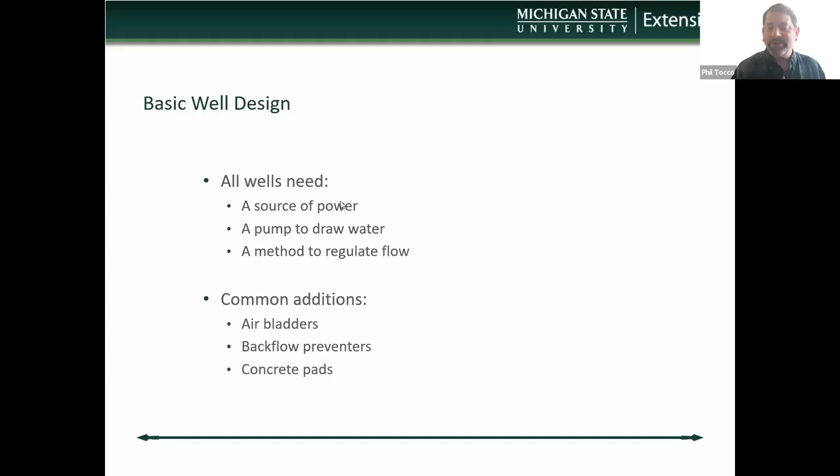Now, okay, so we have three basic types of wells. The dug well is that well that Annalisa showed. It tends to be a shallow well. It's not a very deep well. Usually, you have to have a high water table to get down to water.

There is, in fact, even with all of those precautions, even with a roof and that stone wall and a cover on it, a pretty high risk of contamination for a number of reasons that we'll discuss a little bit later. So the well is good for a lot of uses, but again, it's still a pretty high risk of contamination.

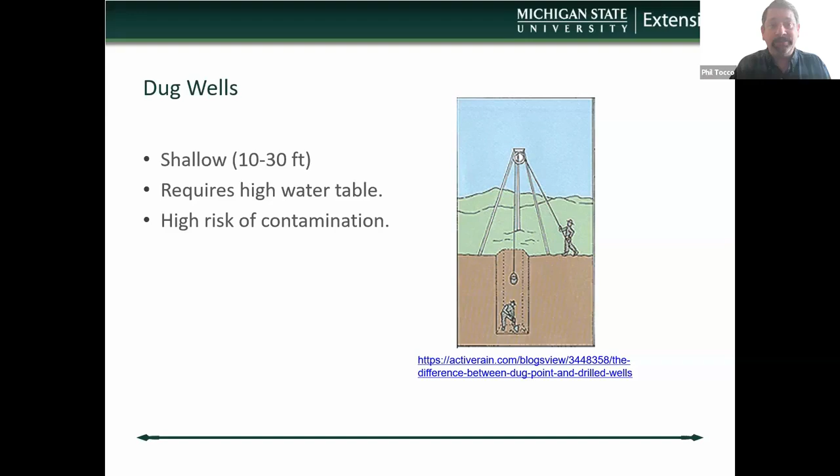Driven wells are another one. You'll see this in a lot of sandy areas. You'll see this in places that are close to the lakes that have a lot of sand and also have a fairly shallow water or high water table. It's a shallow well again, up to 30 feet, and literally the point is driven into the sand down into the water table. It's often used for irrigation because it's very quick to install, relatively speaking.

It's cheap to install. I bought myself a sand point well as a demo device; I think I spent $50 on it. I would need maybe another 20 feet in stainless pipe that would attach to it, and then a driver of some kind or other to drive it into the ground to where it would hit water. So the idea is you're not spending many thousands of dollars to put the well in.

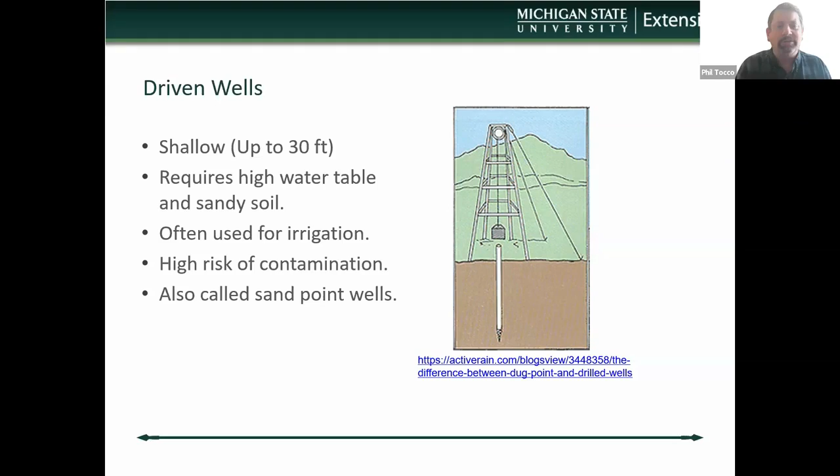It pumps a reasonable amount of water, but what it pumps is largely water from a surface water source that's been drawn through the column of soil and particulate that it sits in. So they are also called sand point wells. And because they're drawing a lot of surface water in general, there is a pretty high risk of contamination there. And again, we'll talk a little bit more about how wells get fouled as we move along.

The gold standard, what most people are using if they have a home well or if they've got wells out in the country, are drilled wells. Typically, these are very deep. They usually go down at least 50 feet, usually deeper than that. The deeper they are, the safer they are generally. Basically they dig down until they reach the bedrock, and they dig down just a little bit deeper than the bedrock when they hit water.

And then they sink a casing right down so that it sits on the bedrock, and then the well itself draws from the rock underneath, the fissures in the rock. Typically, they take that casing and they pump a mixture of bentonite, which is a clay that swells, and they mix it with a little bit of sand and a little bit of concrete so that it forms this watertight seal.

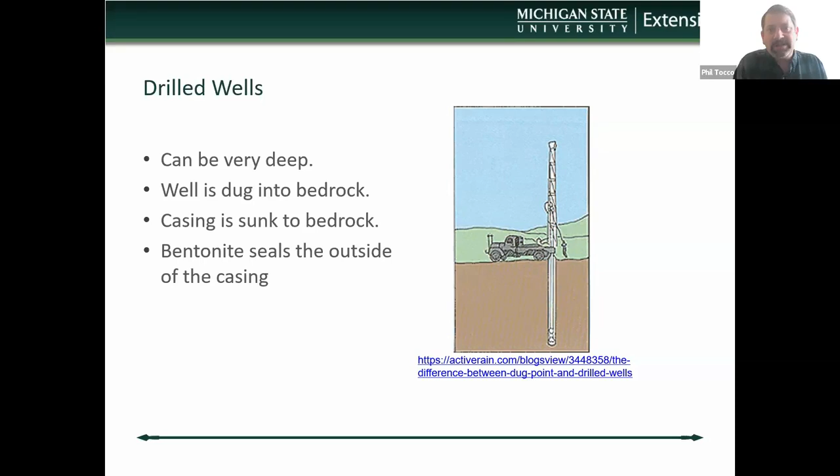And because there's bentonite in there, that clay is unusual in that when it gets water, it swells. And if it's dry, it shrinks. And they put it in dry so that it stays there. And then if water gets around into that, it'll swell up and tighten around the well casing. So it's a nice way to ensure that there's a nice tight seal there. So that's kind of how those are set up.

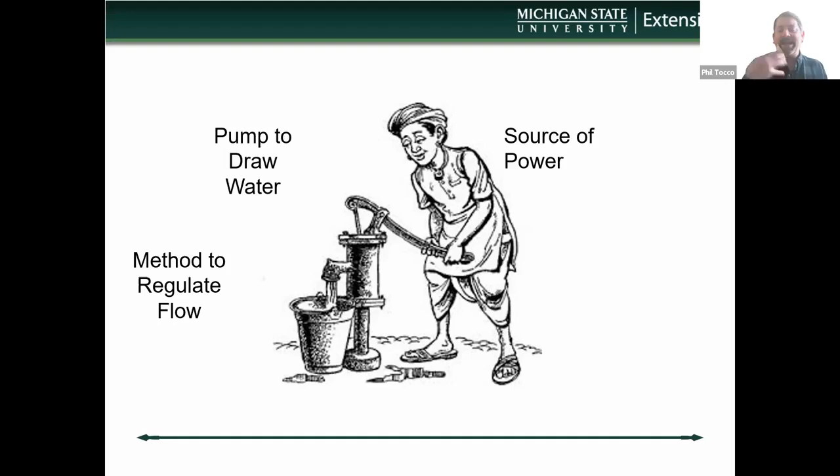Again, we talked through the wishing well example with Annalisa, but you see the same things that work here at a hand pump well. The source of power is the person doing the pumping. The pump to draw water is the plunger at the bottom that does this up and down motion that draws the water up into the column, and then the method to regulate flow is the actual stopping and starting of the pumping. So that kind of thing is true across the board.

Now we're going to talk about the pump a little bit more, and about other things that you might see. So there's three basic pump designs that you're likely to see in the Midwest when it comes to drilled wells. You could see a jet pump, an impeller pump, or a submersible pump.

Now, I use these three general designs because you're going to see this sort of layout of a half circle sitting on its side with some piping coming out and going into the ground, or you're going to see the half circle sitting above the well hole, or you're going to see a big round cylinder sitting on the ground. That's how I'm representing all three of these, in a very graphical icon sort of way.

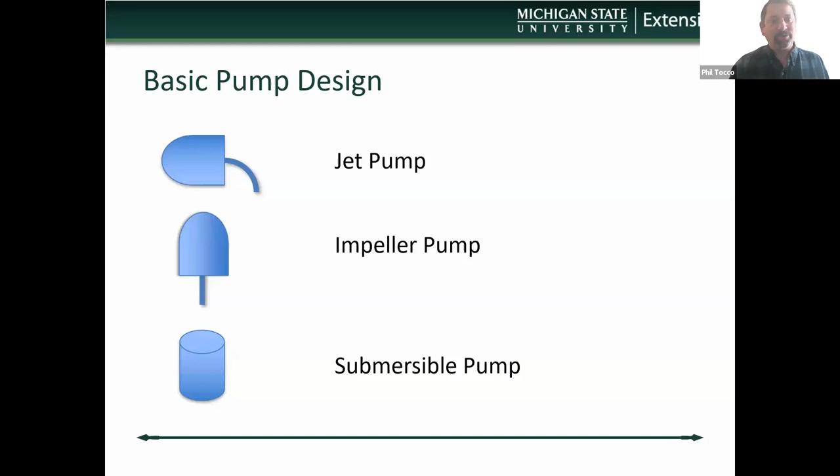So if, for instance, you have a really deep well, you're probably going to use a jet pump to pull it out. If you have a shallower well, other pumps might be more appropriate.

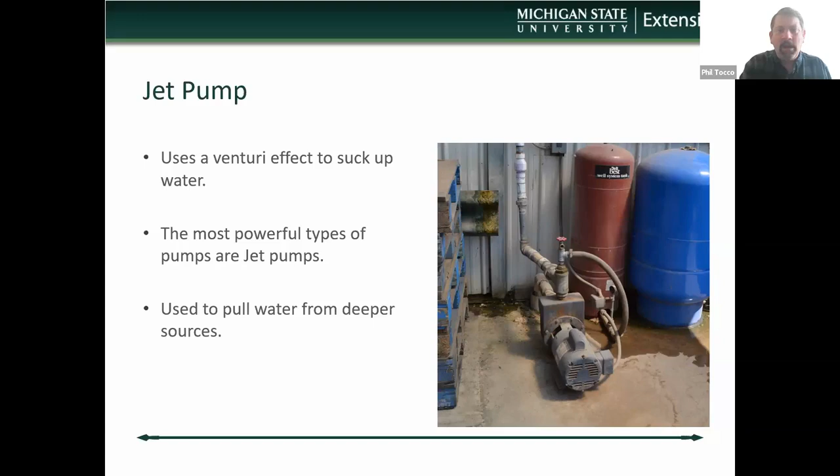It can generate higher volumes, but it's not as effective for deeper wells. So typically, 65, 100 feet. And it's hard for me to give a generalization, because anytime I come up with one, usually somebody says they found an exception to the rule. So as much as I say they can generate higher volumes, in some cases they may not be able to generate the volume you need. And it may be that they have a deep well that runs an impeller pump.

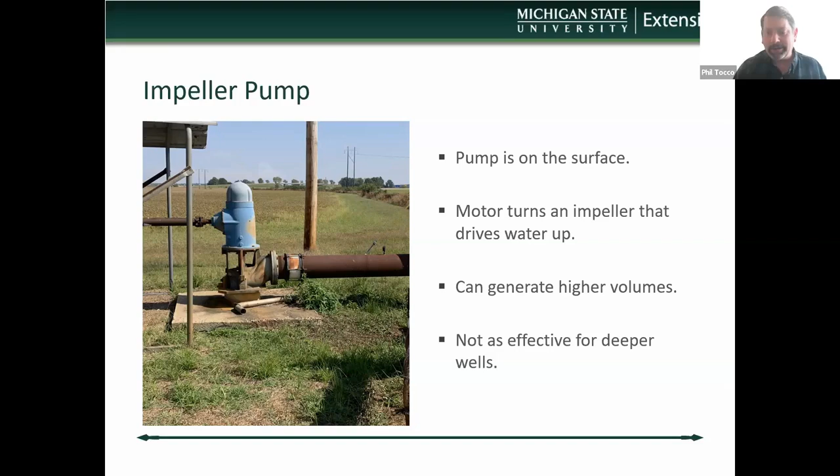So there's a couple of big issues with impeller pumps. The deeper they are, you can imagine if you've got a really long rod and there's a little vibration up top, because it could essentially act like a lever, a little vibration up top could cause big issues down below. So that's why an impeller pump may not always be the best choice, because that rod that drives the impeller at the base of the well is long. If you aren't perfectly stable up top, just a little vibration could mess up that rod pretty quickly.

So the last one is a submersible pump. If you've got a sump pump, like a dry well or a sump in your basement, the pump used in your sump pump is a submersible pump. It is built to live underwater. So typically the pump itself is below the water line, and it's used for lower volume withdrawal, like in a house situation.

So typically anybody that has significant acreage or needs significant water, if they've got a submersible pump in a home well, they'll likely also use a cistern. They'll use the home well to fill the cistern, so they can have adequate volumes of water when they need it. So you'll see that typically with submersible systems. Again, these can be very deep, 100, 200 feet deep. It doesn't necessarily matter. They can do pretty well.

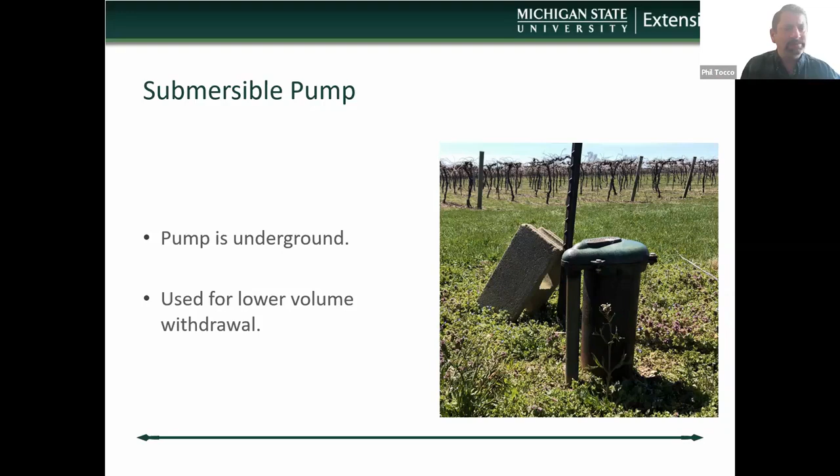So other parts you might see, and this is where we start to get into things like backflow preventers.

Oh, we've got a chat question. I want to make sure I don't lose anybody. Phil, would you say that the drilling company will generally indicate what type of pump to use? I would say yes. Most of the time you're not going to have to worry about that. They'll say, yeah, you need an X pump, or they might prefer a particular kind of pump. So they'll set it up in a way that makes sense. So yes.

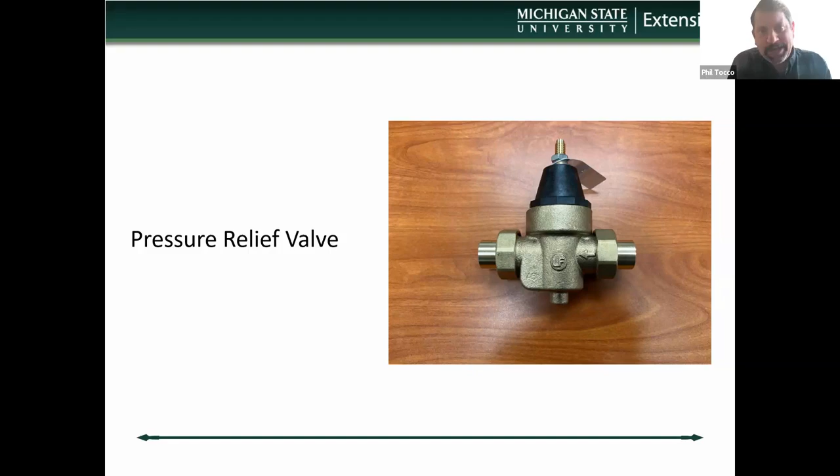Good example is if you're using drip irrigation, sometimes you need pressure reliefs or pressure regulators in the system to maintain a certain level of flow in a given area. So if you're using drip tape and you want to know that you're giving 10 gallons per minute, it may only be 10 gallons per minute at 10 psi. So putting that pressure regulator in there will keep the system at 10 psi and no greater. Because you could probably pump enough water in there to really drive that up. And then what you get is blown out drip tape and other things like that. So it helps to make everything work right.

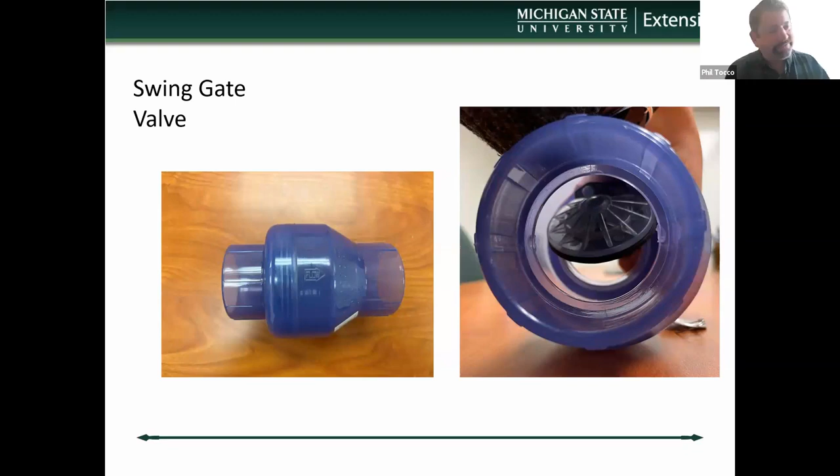So another thing is a swing gate valve. Now you'll notice some pictures here that show the arrow on that, the direction of flow. But there's some other interesting factors around this, and I'm going to stop sharing my screen for a second so you guys can see. I have the swing gate valve here. This is going to be interesting to see if I can make this work.

But the problem with the swing gate valve is it swings like this, and if it's oriented in a wrong direction, you'll notice how it just flops around like that. It never closes. So not only does it have a direction of flow arrow, but it also has an orientation. So it'll say this side up on it. So if it's sitting like this, let me see if I can make this work. If it's sitting like this, you can see it clamps down. But if it's sitting like this, it doesn't clamp.

Or if it's like this, you'll see it kind of droops around like that. So if I had it in this direction, it wouldn't work as a backflow preventer because the water, instead of stopping up here, would go right through, continue to go right through. So that's why that works. That's why it has an orientation as well as a direction.

The reason why someone would pick one thing over another has a lot to do with cost. In some cases, a swing gate valve may be less expensive than another valve that works a different way. So we're going to go back to sharing again.

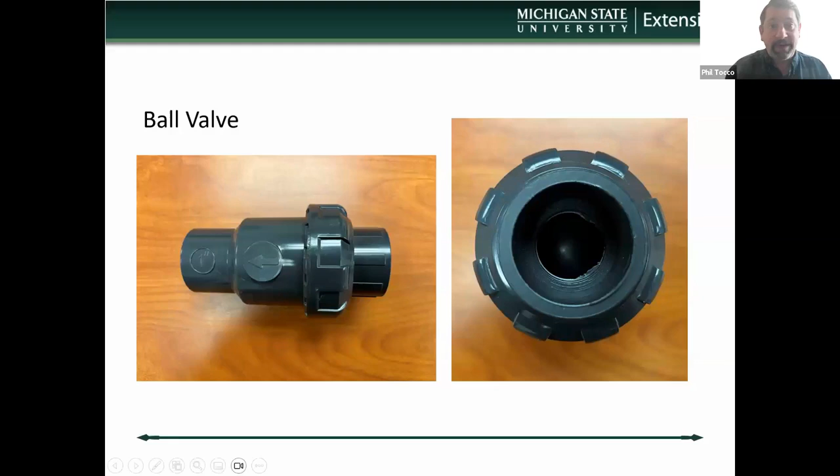Okay. So then we've got a reduced pressure zone valve. Now this valve is typically only used for municipal systems and large scale commercial applications for water. This is what I would consider overkill for agriculture. So if folks are trying to sell you this as a backflow prevention device in your system, it is not appropriate for agricultural uses.

This RPZ, each one of those black plugs on top is a check valve. So it creates an area between two check valves of reduced pressure. It's sort of a fail safe. If one check valve fails, you've got two or three more to keep things in line. So it's extra insurance to make sure it works right.

Typically, they start at about $300 and go up from there. Most check valves, you can probably get a simple check valve for like $10. For 10 or 20, you can probably find an adequate check valve. And in some cases, you can get one that screws right on to your hose, at the end or at the beginning of your hose, so that it automatically shuts off and doesn't allow the water to go back into the well.

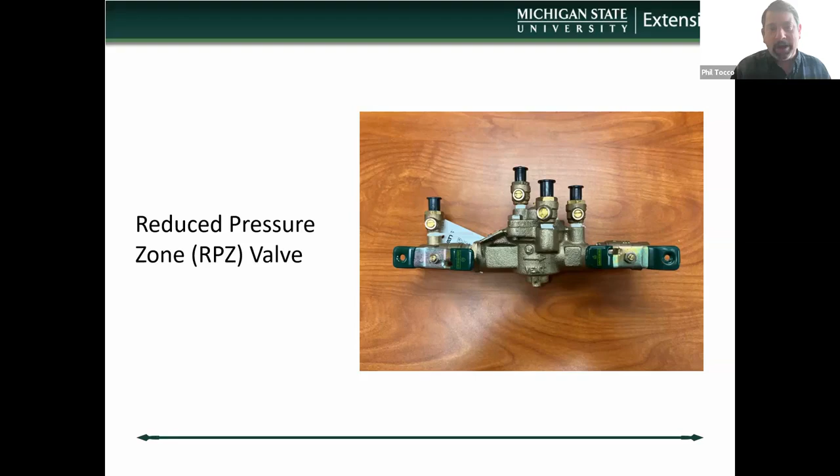In some cases, particularly with respect to the jet pumps, there's a special valve that sets at the base of the well called a foot valve. It sets at the foot of the well. And the idea here is it shuts off the water at the very bottom. So if you've got a pump that's pumping out and all of a sudden it stops and there's a change in pressure, that foot valve shuts, and that keeps all of the water in the water column so that the pump doesn't need to be reprimed every time it turns on.

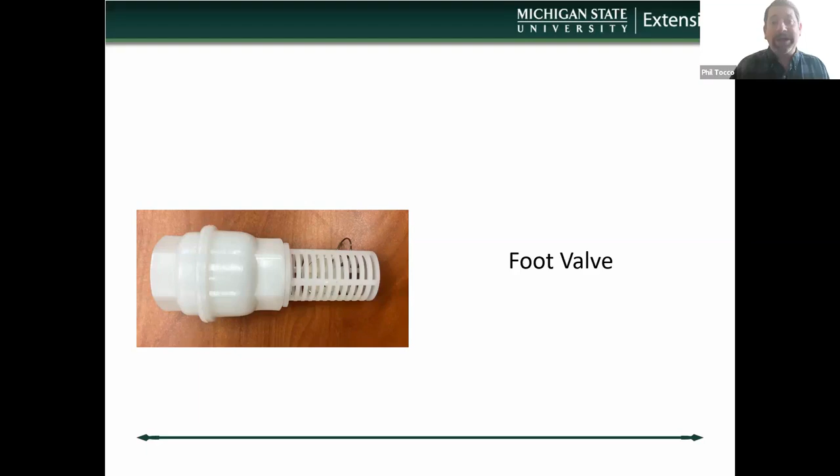So it maintains the pump prime and keeps things running. The next time you turn on the pump, it can immediately start dispensing water. Typically, if there is a foot valve or any valve that's in line underneath the ground, you will know it's going bad because the line won't be able to maintain pump prime. So it'll be kicking on regularly to keep pressure.

In general, groundwater can get contaminated a couple of different ways.

The first is through the cross connection. So we talked about backflow prevention. If there's no backflow prevention, then you get a situation where there could be contamination from up above. I'm going to demonstrate this in a second for you because I think it's important for you to understand all of the different components. So the other way is it could flow down the casing.

So remember, a well is basically like a straw that goes down into the groundwater. So that straw, if your casing is imperfect, or if your casing starts to break down, or that sanitary seal breaks down, then you can have a situation where water can pool around the outside of the well, and that can get into the water. That's why when Annalisa mentioned that stone wall around that wishing well, that was to prevent pooling water from getting into the well.

Now, other things that can happen over time, feces and other contaminants can flow down into the water column through the dirt and then get moved as water gets moved through the soil into the groundwater. So that's a potentiality. Typically, most of the time, water and contaminants move very slowly through the soil. So it's matters of tens or hundreds of years before you get any kind of contaminants, unless there's a high water table, in which case there could potentially be some contaminants that slowly perc into the water table that you're drawing.

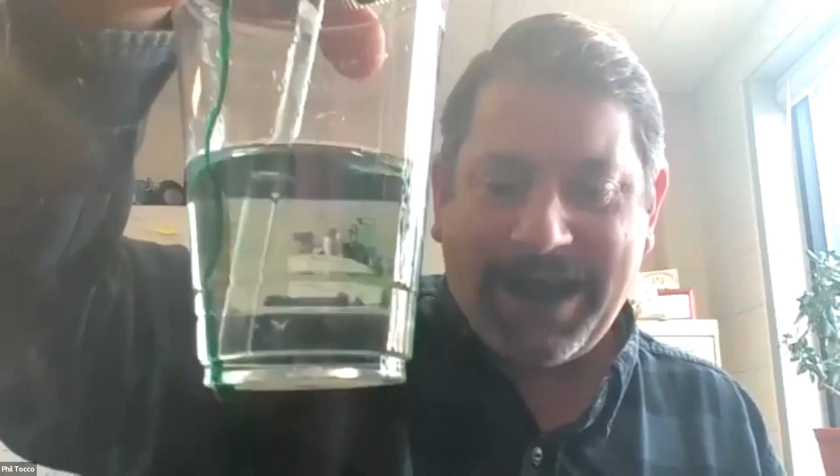So do y'all see the, oh, crud. Now you can kind of see that there. I've made a huge mess of my computer in trying to make this work. So that's the second way. So you saw the two ways. Turn off blur so we can see. All right. Okay. Then you get to see. So you can see that it's blue, it's green, and I'm getting more on my computer. But the idea here is the fact that it's over top.

My computer is never going to be the same. Okay, real quick. I should have kept some stuff. All right. If I cut out, you'll know that I had some issues with my computer getting too wet. It's going to be green inside. The people that are, it was worth it. Thanks.

So okay, back to the original presentation. So now that we've gone through that, we need to talk about the rest of the story, if you will.

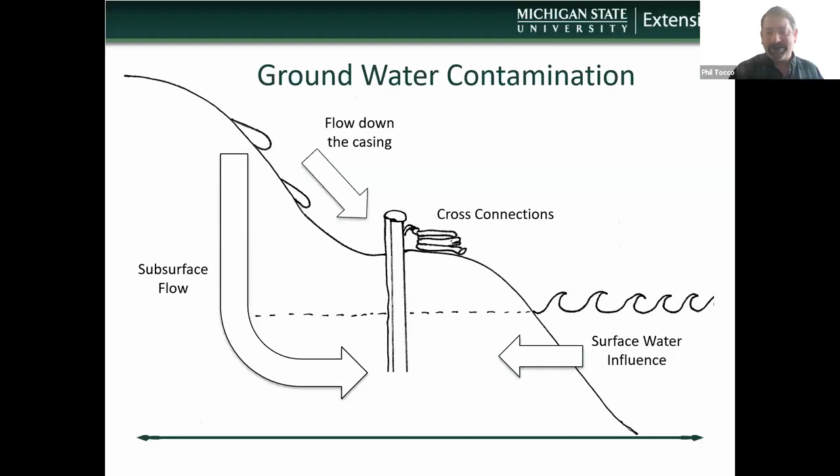Okay, so there are a couple components of, I'm going to really talk specifically around a consumer well, because I think it's important to talk about the different components, because you're most likely to have a submerged well or a house well. And so that's why we'll talk about that in particular.

So one of the key components of a submerged well is the well cap. And there's different ways of doing a well cap. There's different styles of well cap, but in general, they all basically have a rubber expansion gasket of one way or another. And the idea with that is, as you screw the cap in place, it will expand the rubber gasket, and that will create an airtight, watertight seal. And it's sometimes referred to as a sanitary seal.

You may also find a screened vent, because what happens is when you pull water out of the ground, if you have an airtight seal, you're basically removing something from the ground, and there's still a vacuum. Water doesn't just come out and air doesn't just miraculously pour into that space. You need to have a way to get air into that space that allows for that free pull of water without creating a vacuum. So typically there's an air vent that will allow air to get into that space and fill that space that you just took water from.

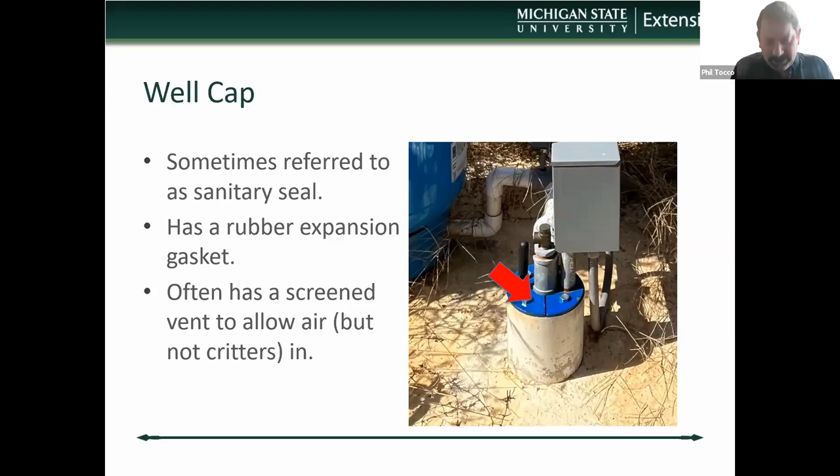So there's a commercial type of well cap that has a gasket that sets on top when it's screwed in place. And in this case, the one pictured actually has two metal plates with the gasket in between. As you tighten those bolts, they squeeze the plates together. And as they squeeze the plates together, that's what pushes that expansion gasket out, creating that airtight seal. So those are two flavors of home wells that are out there that you can kind of look for. The next one is a well casing.

So in this case, when you look at that, you see that 4-inch PVC pipe. It can be made out of PVC. It can also be made out of stainless steel or carbon steel. It can also be solid or perforated. In some cases, you're going to have a casing that goes down into the water table. And in the area where it is in the water table, that casing really needs to be perforated so that it can allow the water in to get pumped up. But the perforation level is actually usually in the bearing layer. You don't usually get perforation above the bearing layer.

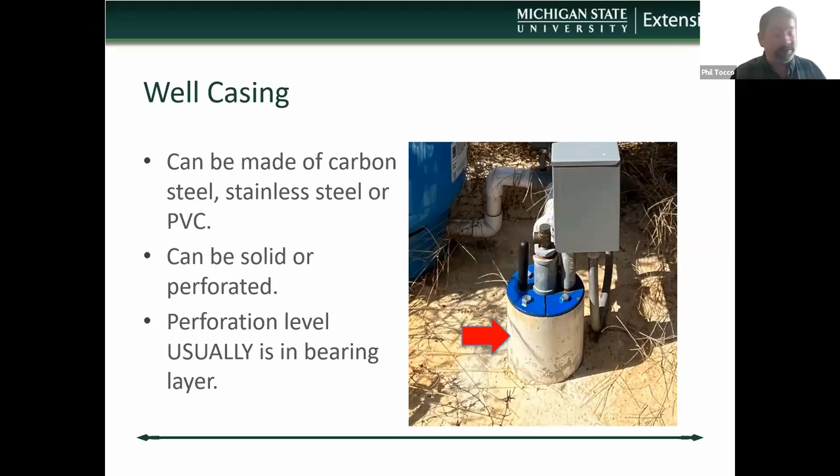In some situations where there could be saltwater pockets, you definitely do not want to have perforation in those areas. Even in the Midwest, where we have an abundance of fresh water, we also have situations where there are pockets of salt water. So we don't want saltwater intrusion, obviously, when it comes to not only agricultural wells, but food wells in general or home wells in general. So we try to avoid that.

And then the other thing is the sanitary seal. We talked a little bit about the fact that that's made up of bentonite and cement and sand. And they also call it an annular seal, and states usually have a minimum depth of seal that they require all wells to meet. In general, you want to make sure that this is in good condition. Some people actually put a cement pad on top of their annular seal.

Like I said, that bentonite swells, and when it swells, if there's concrete above it, if there's no place for that increased swelling to go, it's going to break the concrete pad. It takes a long time before there's enough water in bentonite to make it swell enough to break concrete. And you would still have enough time, if that concrete breaks, to check to make sure that there isn't a problem happening with your well.

So it's usually an early warning device to put a cement pad on top of your well and on top of that annular seal. It gives it an added level of protection from water getting into it, but it also allows an early warning when it breaks, when it busts. Likely what's happening is at some point along the annular seal, there's some water getting in there that's making the bentonite swell, that's breaking that concrete pad. So that's when you need to call the well guy and say, I'm thinking my

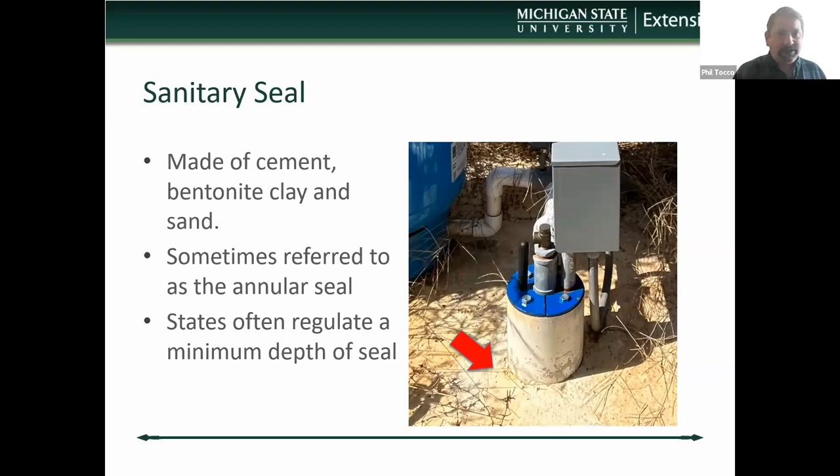So another thing you might see in a water system is piping tanks. I alluded to the fact that commercial wells may not have a significant volume or flow rate to accommodate what some uses on the farm need. So the piping tanks allow you as a grower to essentially stockpile or run your pump throughout the day to get all the water you need, so that when you need it at once, you've got it all at once. So you can often see piping tanks like this, but it also can relate to pressure tanks.

Sometimes you'll see a blue tank that looks like a propane tank. It's called a bladder tank. It's there to maintain pressure in the system. It's kind of like maintaining pump prime. We maintain pump prime so that when we turn the knob, water will come out, but it doesn't always come out at pressure. So that bladder tank holds a certain amount of water to maintain pressure in the system. So you've got your pump prime that maintains the flow, but then you've got this bladder tank that has a little bit more that keeps the pressure high so that when you turn the handle, it doesn't dribble out. It comes out at the pressure you expect every time.

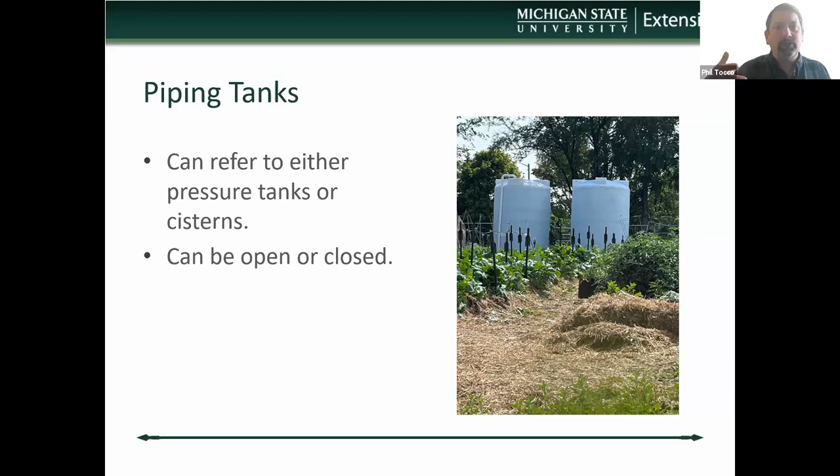These piping tanks can be open or closed, and it's important to think about the potential risk associated with an open cistern versus a closed cistern. So think about how critters can get in there, or if critters can get in there, and then work to minimize the potential risk associated with that.

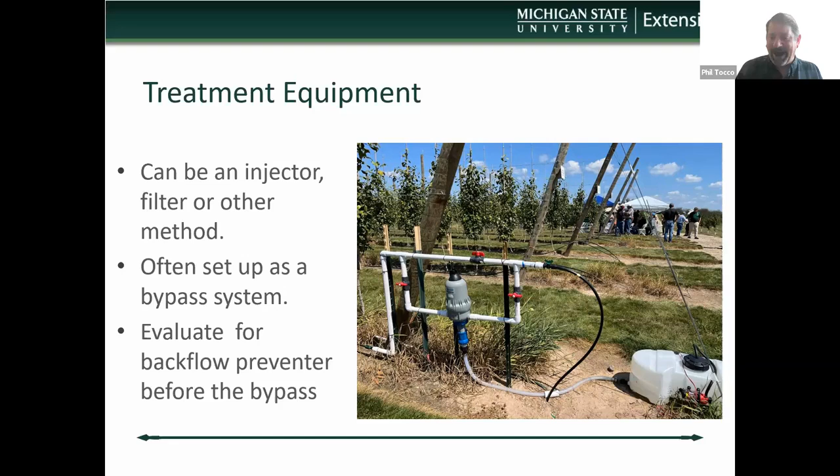So when it comes to choosing a lab, the only way you can really determine whether or not your well is actually having a problem is by having a test. Michigan State University, and probably University of Minnesota, I can't speak for University of Minnesota, but Michigan State University strongly recommends that all wells be tested. There is a national water lab map hosted by the University of Vermont that can help you find a lab that does generic E. coli testing,

which is a pretty good indicator for whether or not there's poop in your water. And that's the big thing, making sure that the poop stays out of your water, because poop is the big contaminant we're mostly worried about. We're sometimes worried about things like PFAS and lead, but most of the time we're worried about poop. So that'll be a way to keep track of that. Someone put something in the chat. I want to make sure. Annalisa says we do have a map for Minnesota as well. So yeah.

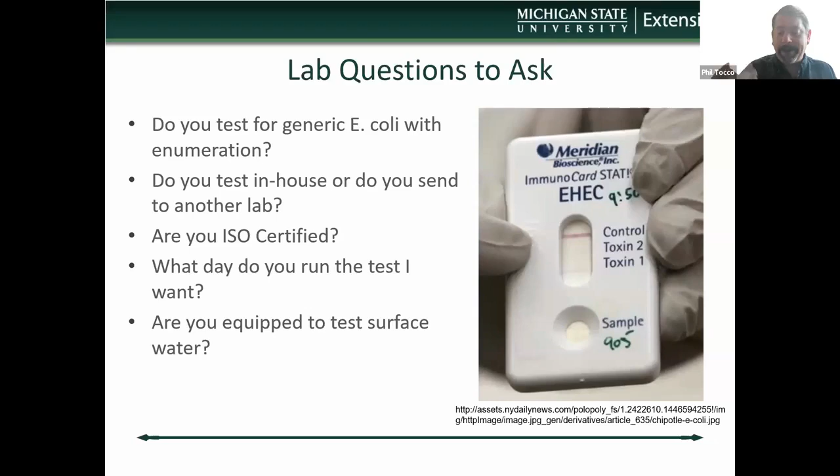And then the last one is, are you equipped to test surface water? A lot of times, the labs themselves may or may not realize that what you're bringing them is something that could have potential contaminants in it. And if you're bringing them a Sandpoint well, there could be a high number of generic E. coli in that, so they need to be prepared for enumeration that way.

Sampling, I'm going to skip that. Just make sure you sample at a place that's representative of use. So for instance, if you are irrigating through sprinklers and you want to make sure that your entire system is not contaminating the sprinkler system, you want to go to the last emitter and take the sample. If you are sampling a water body like this, you want to go to where you're pulling from that water body, so that you've got a pretty solid understanding of what it is you're actually getting.

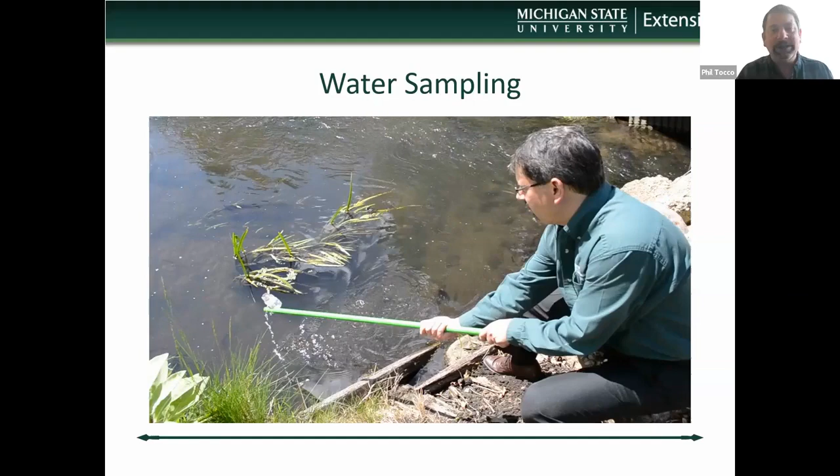In general, the other thing to remember with the bottles: first off, get your bottles from the testing lab. They typically will give you the bottle. It will come like this. It will come sealed with plastic. It's important for you to keep that plastic on until you are ready to pull the sample, because the inside of that bottle is sanitary, and the stuff that we're testing for lives on us, lives in us, and it doesn't take anything for us to get that stuff from our bodies into the bottle.

So we want to make sure not only that we've washed our hands before we take a water sample, but that we've also used hand sanitizer so that our hands are extra clean before we take the sample and before we open the bottle. We don't want to rinse the bottle beforehand, because we want to make sure that we aren't putting more stuff into that bottle and getting an inappropriate or non-aseptic sample.

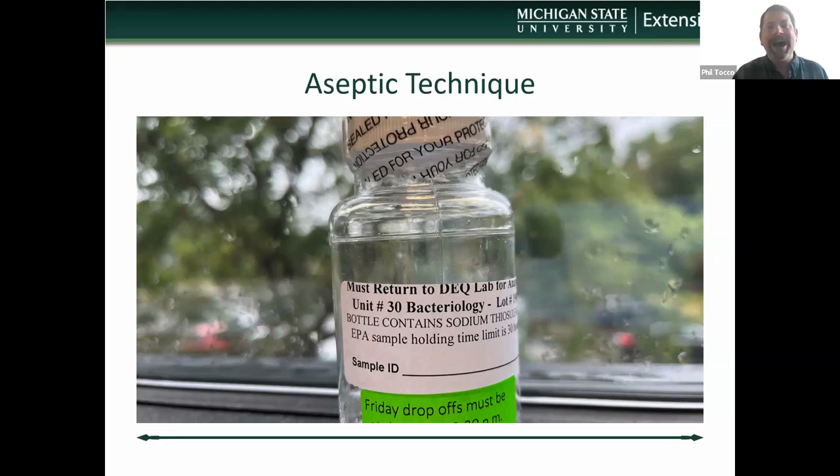As soon as we take the sample, we want to make sure we put it on ice so that it maintains its integrity. We are trying to measure stuff that is alive. Okay, we are trying to measure stuff that actively can grow and die. So the more we keep it chilled, the more representative we're going to be. It could warm up too much and then those critters could reproduce, or it could warm up too much and those critters could die, and then we don't have an accurate accounting of what kind of bacteria are in that water. And here's my contact information, and I'm open for questions at this point.

Thank you, Phil. Sorry I didn't leave a ton of time for questions. Oh, no, you did. No, this is perfect. We have plenty of time. Yep, this goes until 10:15. And I've got a Gene Simmons tongue to boot. You do. A Gene Simmons tongue. I love it. We need this. We need this today, Phil. Thank you. Does anybody have any questions on that?

If RPZ valves aren't for ag, what are they for? So that's a good question, Jackie. So if you have an RPZ valve, let's say there's water going in from the municipality into a condominium complex or an apartment complex, you'll often see RPZ valves going into that apartment complex so that the folks in the apartment complex don't foul, because any one of them could do anything to foul the water that goes back into the municipality's main line. Does that make sense? Okay, cool.